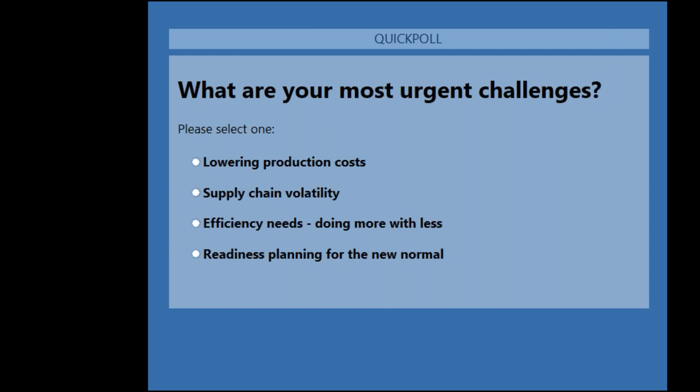I'm getting an error on my side. Let me just pause something real quick and I'll be right back on the line. Okay. All right. Sorry, I was having some connection issues there.

I'm not sure. So anyway, regardless of what you answered, you're not alone. We pulled this information from the National Association of Manufacturers about 2 months ago, and essentially more than 3/4 of manufacturers anticipate a financial impact from the COVID crisis. More than half at that point in time foresaw operational changes, and 1/3 expected supply chain disruptions.

So as we navigate the new normal, we at MECCO are looking to leverage technology to better support our customers in the future. We've already been remoting into systems from the service side, hosting web meetings and virtual demonstrations, and even conducting some system runoffs over online platforms. So while it's challenging, there are some significant benefits we've been able to see, such as being able to quickly be in front of customers without all the logistics of traveling.

We're also able to pull in more of our team members and our resident experts, and we've seen the collaboration, frequency and participation increase from our customers as well. So different business units, different groups that have been geographically isolated, are getting together and getting on joint calls with us as well.

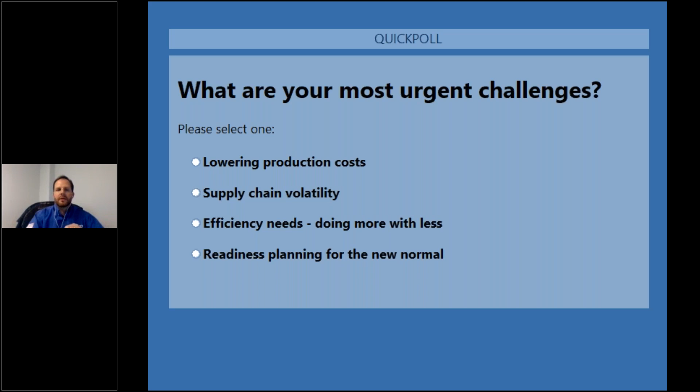Lastly, we'll discuss some best practices that companies are using to enable traceability through their supply chains. And again, this being the first one, it's going to be very high level, but we will have future webinars to get more down in the weeds on the specifics. All right, so why choose direct part marking?

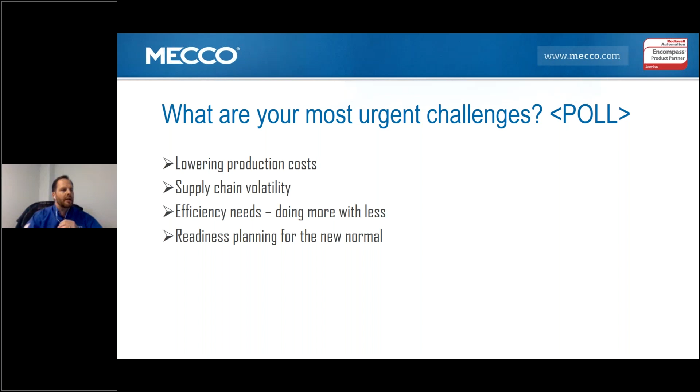In this webinar, we're only going to be discussing variable direct part marking technologies and the benefits associated with permanently marking parts. A lot of customers over the years have told us about challenges they face with adhesive labels, inkjets, paint marks, pad prints, and static marking such as stamping and die inserts, which we're really not talking about, with part-to-part differentiation. So the two technologies we're going to focus on are laser technology and pin marking technology.

Laser technology really provides the greatest amount of versatility. Depending on the type of laser, you can make marks on metals, polymers, coatings, packaging, really all sorts of substrates. And as the price of lasers has come down over time and the power levels have increased, we're seeing more and more justification to go with laser for applications, from surface etching to deep engraving applications that will survive postmark processes like shot blast or paint.

With laser marking, there are special considerations like laser safety and environmental requirements. It needs to be a fairly clean environment for the laser to work.

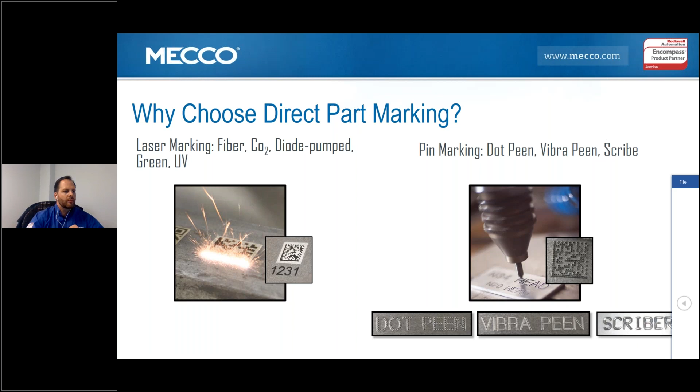There really are two different types of marking. There's the simple, basic part identification. This could be anything from part numbers, date codes, serial numbers, logos, customer instructions, and more. Then there are more complex marks where a unique identification is provided to the product, and a manufacturing MES system or an operations database is used to actually track that product through the different processes.

So I'll give you an example here in a second. In the case of a track and trace, that can greatly reduce the number of times that you may need to mark a product. For example, I've seen some companies applying special markings after testing to show the product passed a certain test or operation. And if a product goes through 2 or 3 different tests or operations and gets multiple marks, if that information can be recorded instead in a relational database, then there's a lot more error proofing that can be done. So for example, if you can put a 2D code on a product, track it into an operation, test it, pass the test or fail the test regardless, append that information of what its test results were to the MES system, then you can really look to eliminate any potential errors, skip operations, skip tests, things that could escape out to the customer.

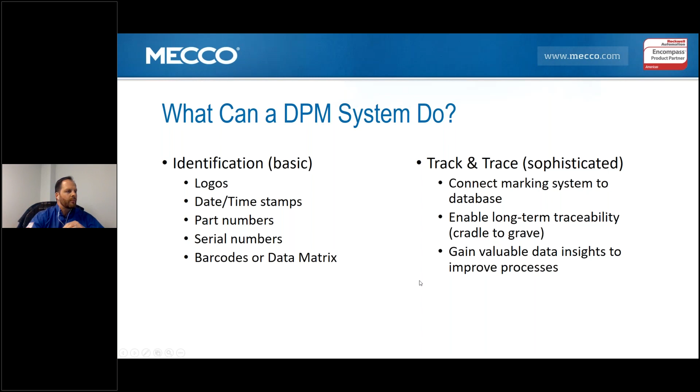So there's a lot more to traceability solutions and what goes into those solutions, and we're planning on covering that in a separate webinar. But just high level, when you're thinking about marking, think about what the end goal of the mark is and what you need to do. So once you determine what type of marking you're trying to achieve, then it's time to consider what the right marking technology is going to be. The materials that are being marked, the current manufacturing process, enterprise level requirements, all will play into that decision on which type of equipment is right to use.

So we like to ask a lot of questions of the companies we work with in this stage, like how is the part presented for marking? Is this a batch process where lots of different parts are made in lines and they're all coming to a central marking station? Or is it an inline marking station where it's another operation, more in a lean mode? There's pros and cons to both.

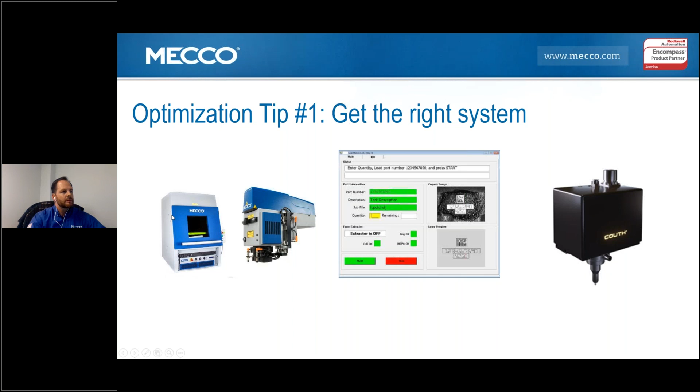So before we jump right into all the different technologies, I want to preface this by saying you don't need to remember all of the stuff I'm going to tell you. Our application engineers are experts in determining what best meets the application requirements. We have all the different technologies available for empirical testing in our labs.

But at the same time, I'm not planning to go very in-depth into all the different types of lasers and pin marking technologies we offer in this webinar either. So really, I'm looking to stay somewhat high level and give you some high level rules of thumb for picking the right technology, and why we might choose one technology over another in certain examples. So the first laser technology that we'll discuss is the fiber laser.

The fiber laser comes in a wide range of power levels from 20 watts up to 200 watts, and those are the pulse lasers. And we even offer 300 watts for a continuous wave. Applications like that might be like polymer welding. So the fibers are extremely versatile, and they can be used to mark a wide variety of materials. The standard fiber can etch into metals, anneal into metals, and as well can be used on a lot of different plastics and other substrates.

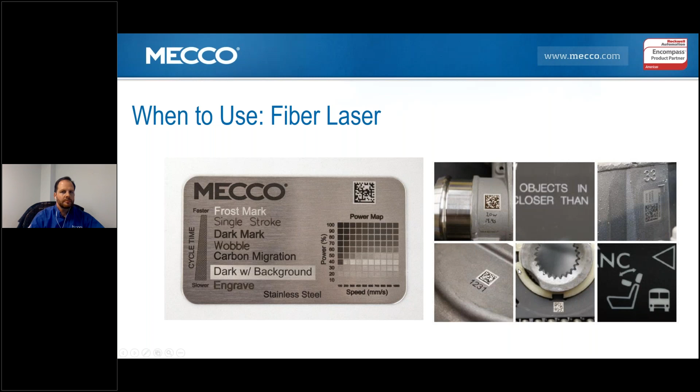The next technology I'm going to talk about is diode pump technology. So diode pump technology has some advantages over fiber. Typically, we see it on some types of plastics. So it really comes down to the shorter pulse width. That's the duration of time that the laser is on per pulse. That shorter pulse width means that you're putting the same amount of energy in a shorter width, and so you're getting higher peak energy. You're kind of doing the work without the negative effect of burning it.

On the other hand, the trade-off is that sometimes the mark time is longer than it is with the fiber. So we work quite a bit to try to balance the mark quality, overall cycle time requirements, and any other variables that we need to consider. So, again, we empirically test everything in our lab. So if one technology is a better fit than the other, we're certainly going to recommend it, but also kind of prove the differences.

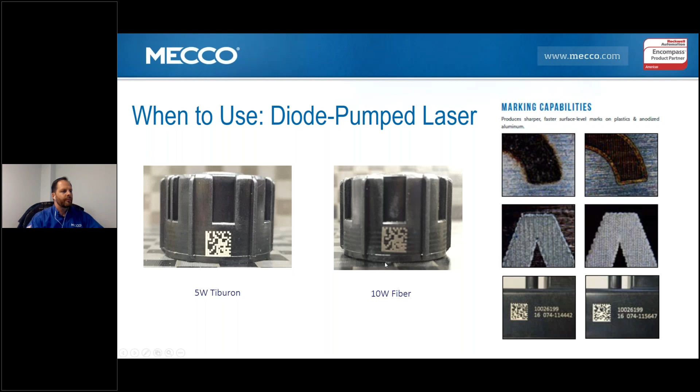And then the last laser technology to talk about really is a CO2 laser. The CO2 laser is a technology we offer primarily for organic materials. So on plastics and on rubbers, you can typically achieve a non-contrast engraved mark. On other substrates like paper, wood, e-coatings, you can typically achieve some level of contrast.

Due to the longer wavelength of the CO2 laser, the laser tends to have more of a photothermal effect on the material. So, in other words, you're burning or melting the material away. Laser safety for the CO2 is a little bit different as well, because of the longer wavelength. Things like safety glasses will essentially block the beam.

One interesting area where CO2 laser comes into play is face shields and polymers like that, where maybe you don't want a real visible distracting mark, but you need something that's almost like a molded in look. And so if you need variable information, but you don't want to have contrast, it's a great alternative to some of the other lasers.

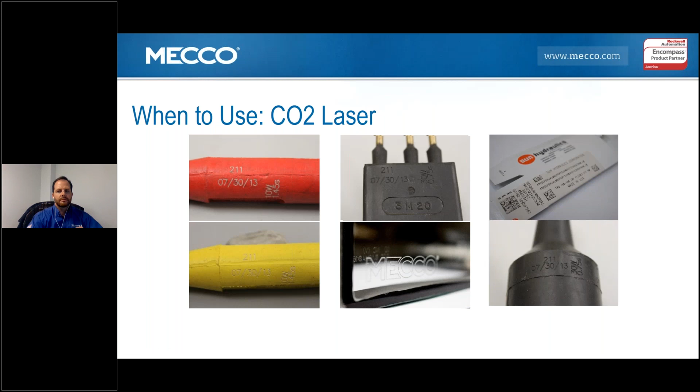All right. So like I said, that was the last of it on the laser technologies, and we will do a much deeper dive into laser technologies in other future webinars. So on the pin marking side of things, we generally start with determining what the overall mark size needs to be on the product. Now, this is a little bit different than with laser. With lasers, we can apply different lens sizes and get different mark fields, but with the pin marking, we need to know that up front, because being a mechanical process, the mark window is really a function of the system.

So we also need to determine things like, is it a stationary system? Are parts going to come to the marking head, or is it a portable system where an operator is going to take the marking system to the parts? Or is it some combination of the two, or is it an automated cell where parts are being presented to an inline integrated marking head?

We also need to determine, is it a dot peen application, vibra peen, or a scribe mark? And there's different reasons for going with different technologies. The dot peen offers a real great quality mark in the fastest time, but some applications require lower noise. So in situations like that, a scriber may be the right technology, because it doesn't have the same amount of noise. Instead of repeatedly hitting the part, it comes down and sort of drags through the part.

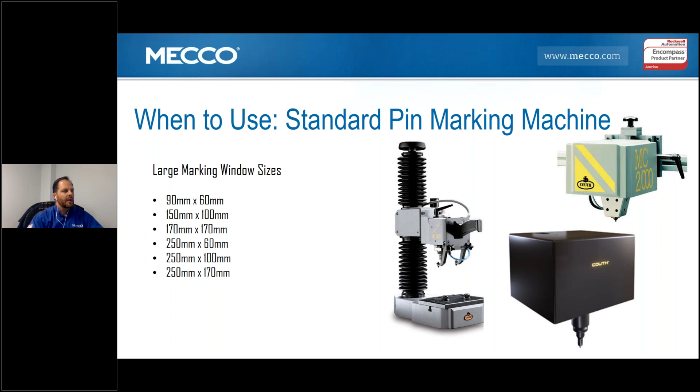Another thing to discuss is, just like with laser and deep engraving, we have deep pin marking. So deep marking systems are ideal for applications where maybe the material is being subjected to extreme wear, or when a coating is being applied. So some examples of when we would need to go to a deep marking solution would be downhole drilling in the oil and gas industry. So things that are going to go into the ground, and the mark is potentially going to wear off because the material itself is wearing off.

Another example is structural steel that gets painted or gets galvanized. So in those cases, we need to go really deep into the material, and we have that type of solution as well.

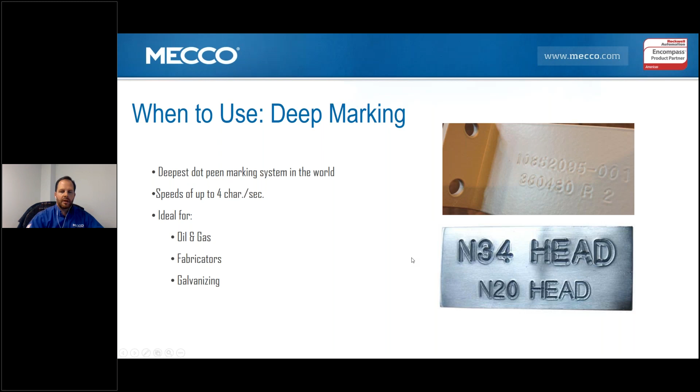And then lastly, on the pin marking side, if cycle time is a concern, our fast pin marking solutions come into play for high volume automated environments. These solutions have limited window sizes due to the pivot design, but if speed's important, we would lean toward recommending this type of solution.

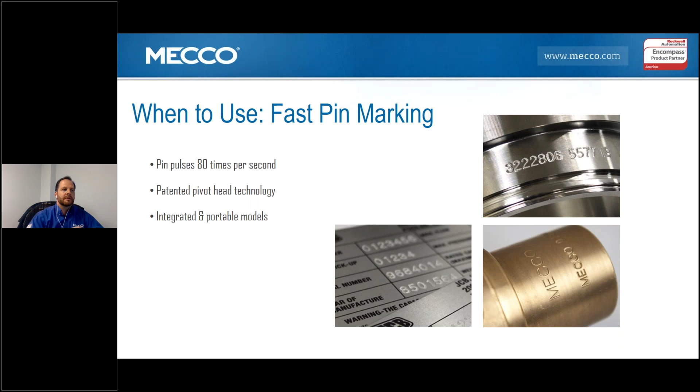So, all right, so that kind of covers how we would pick different marking technologies. Now, we're going to talk a little bit about error-proofing and how vision systems can help. When we integrate vision systems, they can help with our error-proofing.

So at MECCO, we've integrated vision solutions, and in the majority of cases, they're used to check the quality of the mark after the mark is made. So in those cases, as you can see on the left-hand side, we'll verify that the information in the 1D or 2D code itself is the right information. We will actually grade the quality of the 2D code based on industry-defined metrics for assessing the mark quality. And then that information is typically recorded and sent to an external database.

There are other things we can do with vision as well. On the pre-mark side, things like part confirmation, part recognition, and even part alignment. So if the part is positioned under the marking system at an angle, we can offset the marking system to make, as I described it, a crooked mark on a crooked part. So we'll actually have another webinar on integrating vision with marking, and we'll drill further into this topic, but just something to keep in mind. Vision applications can be a good way to error-proof.

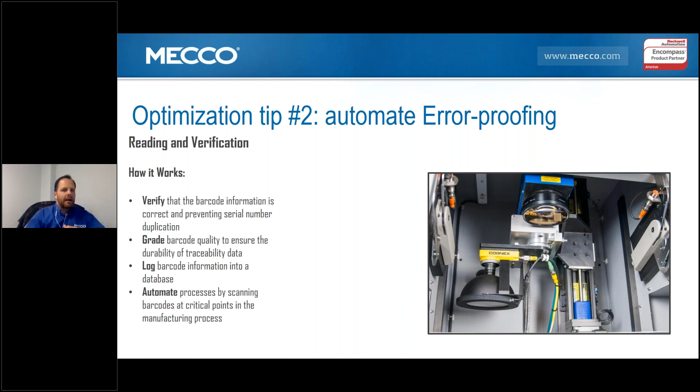And then lastly, my final optimization tip for today is connecting with the data. So like I said before, with reducing costs, going into high-tech automation is really important. This is where we get into true traceability and taking that information and connecting to your database. So data really gives you a competitive advantage. It's tough to determine the value of data until you're collecting it, but in 2017, The Economist declared that data was the world's most valuable resource.

So in addition to the data that you can pull from products in your manufacturing process, you can also get greater visibility and coordination across the supply chain. So a lot of companies require traceability not just within their walls, but from their suppliers. And so having that supply chain continuity enabled is a great way to be able to track all the way through from cradle to grave.

So one way that MECCO helps to enable connecting with data is through the use of graphical user interfaces or GUIs. So if you have a PC-based application, I talked about GUIs for the benefit of simplifying the operation for the operators, but they also in the background can do a lot of data manipulation, either pulling from and or sending data out to an external system.

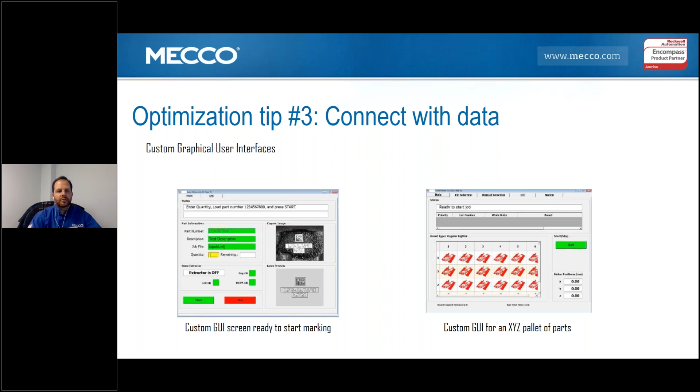And if a PC is not required, another way to get that type of connectivity is through MECCO's EtherMark software. This would allow you to basically network the marking systems without PCs and send information from PLCs.

And again, back to some of the other things we talked about, not just sending the information itself, but sending information about different materials so that the settings for the marking can change, or offset information. So if you need to make a crooked mark on a crooked part, that information can all be sent through PLCs. So just a different way of thinking of how to integrate everything together.

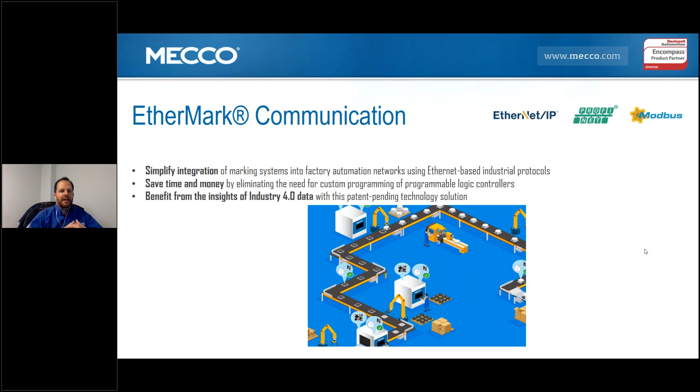So in closing, I hope that you have a better idea of really what goes into choosing the right laser or pin marking system for your operation, how to think about adding automated reading and verification, and really lastly that you leave with some thoughts on how you may be able to use direct part marking to enable a better, smarter manufacturing system in your plant. Industry 4.0, all of that being enabled starting with the unique ID on the product itself.